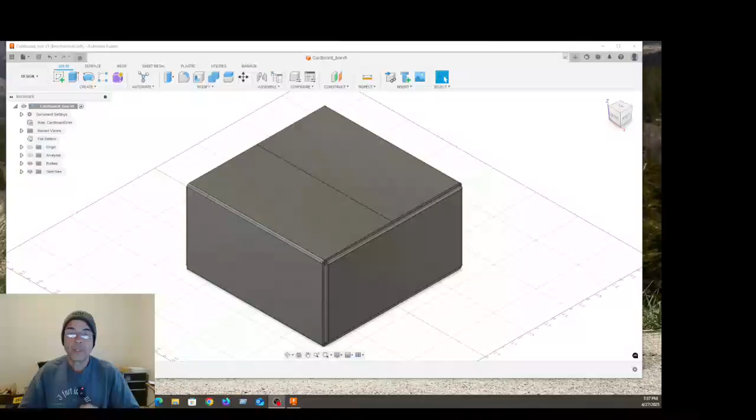Okay, as you're aware, oftentimes one thing leads to another, and that brings us to laser cam with Fusion 360.

So this is a cardboard box that I wanted to make. My wife sells quite a few things on eBay, and oftentimes she has trouble finding a box that's just right. It'll either be a little too small, a little too big, or maybe way too big. So I thought to myself, I have a little hobby dedicated laser machine, I can make these boxes.

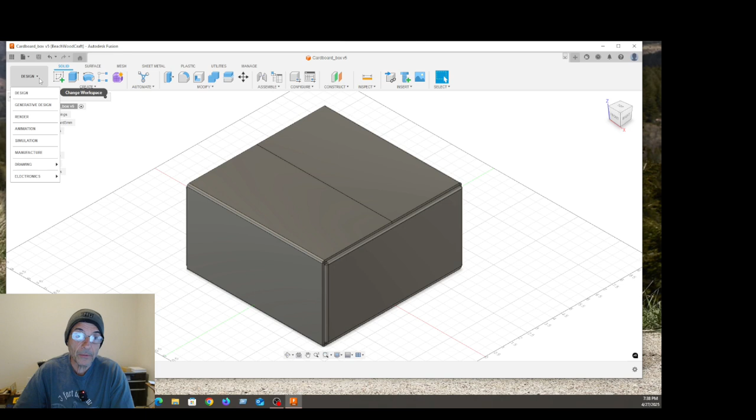Well, when I say little, it's little. If I show you the size of this box, when it's folded out flat, the sheet of cardboard that's needed to make this box is pretty big. The box itself is only 8 inches by 8 inches by 4 inches deep.

But the piece of cardboard we need is over 33 inches long, and the widest part, over 12.5 inches wide. So that's a pretty big piece of cardboard, and that won't fit on my little hobby laser.

But hey, I have a big CNC machine. I can fit a laser module on that, and I can make a cardboard box. So that's what led us down this road.

What led us to Fusion 360 was a couple of things. Number one, I waited too long to buy Lightburn, and the price went from $60 to $99.

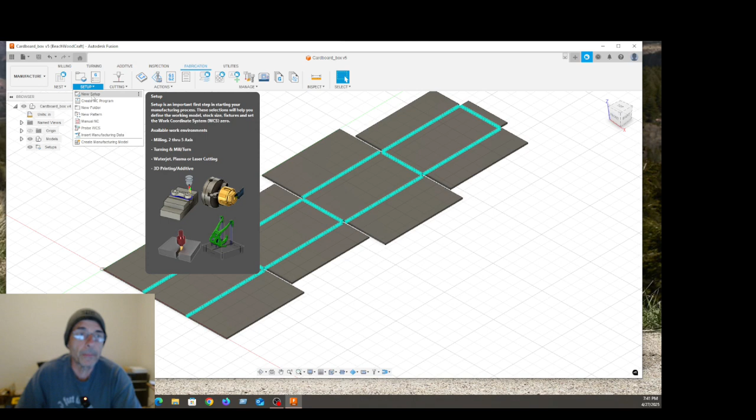First thing we need to do is create a setup. So we're going to do a new setup, and we'll choose our machine. And I'm going to choose a local machine.

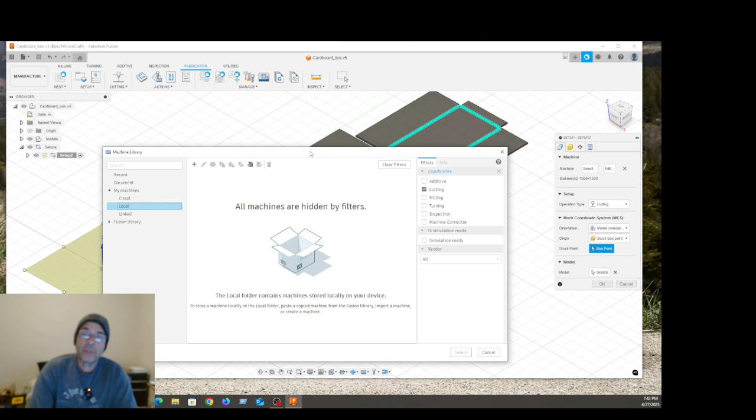Now, Fusion thinks about things in certain ways, especially what type of process it's getting ready to do. So it might be doing milling, cutting, or turning, and then of course additive processes like 3D printing and so forth. But it considers laser jobs, water jet, and plasma type jobs as cutting, and my machine is set up as a milling machine.

So here's where my machine should be, but I can't even find it. It's not here. So let's go in and look at the machine and see why.

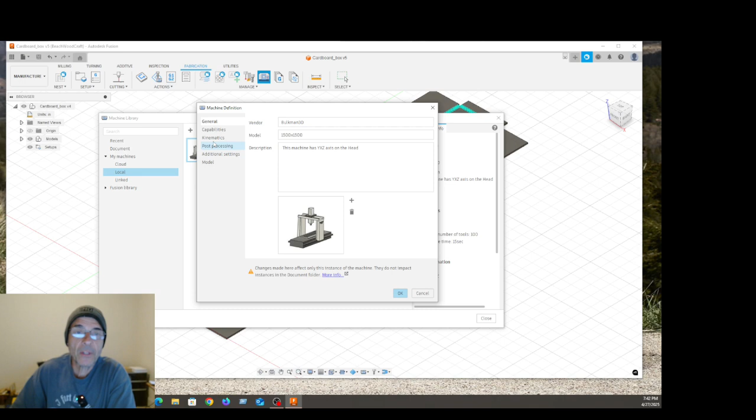So here's my machine. If I edit it, I can see that its capabilities are milling. But Fusion calls this cutting. Laser jobs are cutting. So I have to add that capability.

That's the first step. So once I add the capability, then when I want to do a new setup, I can select my machine. Yay, here's my machine. It can do milling and it can do cutting. So I select my machine.

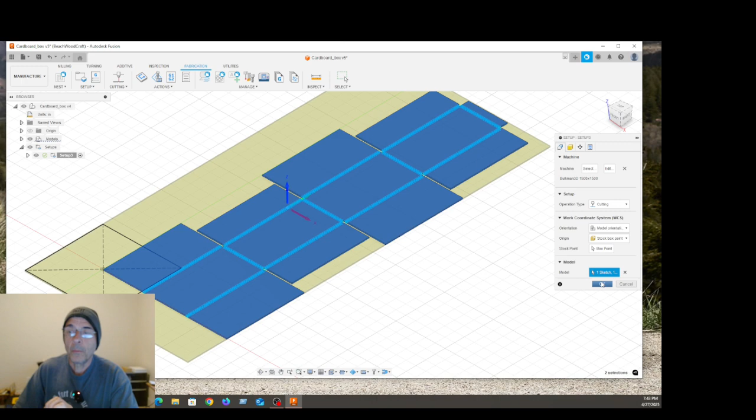I've got my point set up, my model is set up. The rest of these parameters don't matter, because the other thing Fusion assumes is that all these types of processes are 2D processes. So you don't need to move the z-axis at all for this stuff. And so my setup is done.

Now I am going to create a toolpath, and let's select a tool. So my tool for cutting is the laser. So, oh boy, how do I do that?

I look at my library. I don't have any cutting tools. So I'm going to select laser cutter. But how do I get that in here? Can I drag it? No.

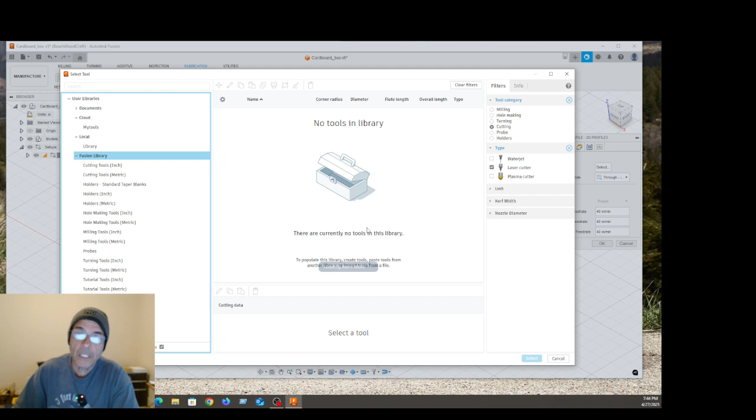So what I need to do is go to Fusion's library and find the tool and copy it into my local library. So there's a laser cutter, right? Inches, metric, choose your poison. Copy it into the local library. All right, so there's my laser cutter.

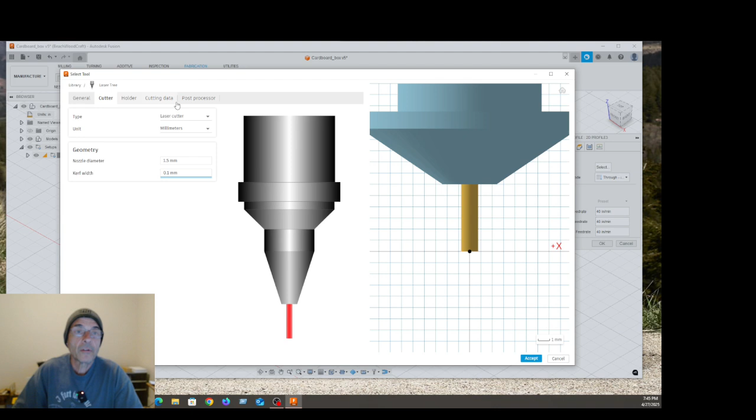I'm just going to edit it to make sure the properties are correct. I can give it a name. Laser Tree is the manufacturer of the one I purchased. Cutter, the kerf is 0.1, not 0.4, so I will change that. And then the rest of the stuff doesn't really matter. I will accept that.

The next thing you need to do is look at these presets for the laser power. So here is feed rate of 100 millimeters per minute and power of 800. My power range is from 0 to 1000. For this process, I'm going to want to use a power of 100 for the...

Well, let's set up a cut process, and then we will also set up a score process. And the score process will be 100, and I'm going to do a speed of 500.

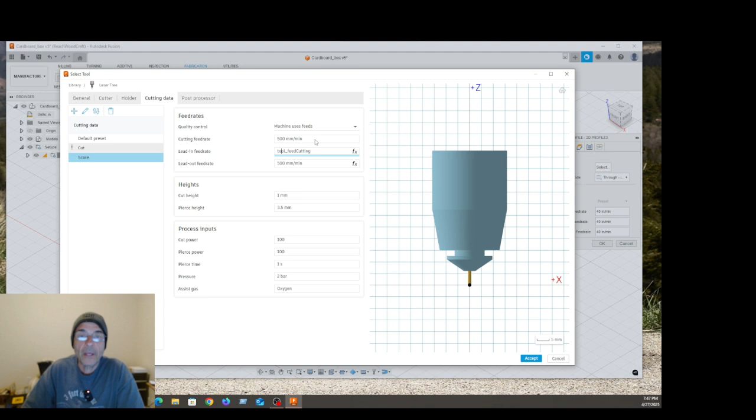And then the cut can stay at those settings, so we'll accept that. Of course, if you don't know these settings, you're going to have to test them and make sure you get them right for the material in your machine. But I'm sure you already know that if you're doing laser jobs.

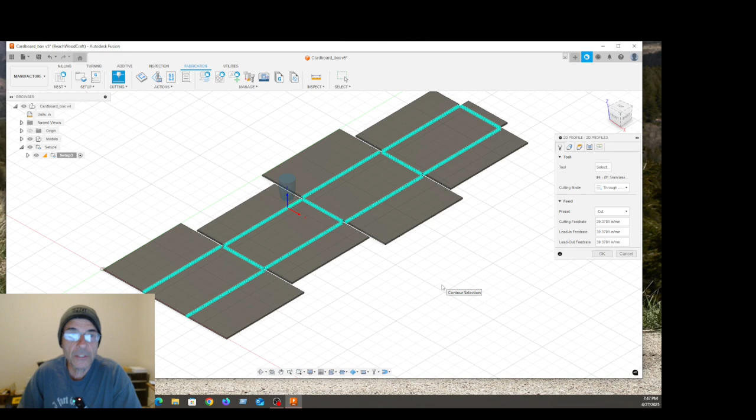So I'm going to select that tool, and now these things have all populated. Let's set up our first tool path. I'm going to do the score first, and I'm not going to try and select all these lines because that's just not worth the time it'll take. Let's just select the innermost path here. We've got 4 little chains. The rest of these things don't matter for this process because we're just doing a score. It's all just 2D. You want to make sure you're only doing one pass.

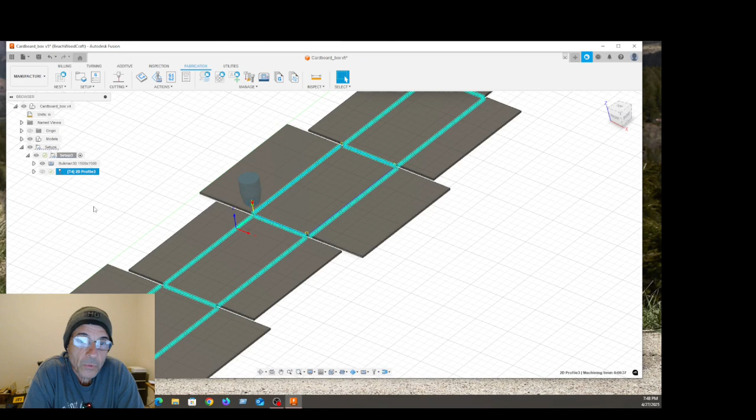So there's our first toolpath set up. We're going to do another one, another 2D profile, which is the only option you have in this cutting process. You can't do anything but a 2D profile.

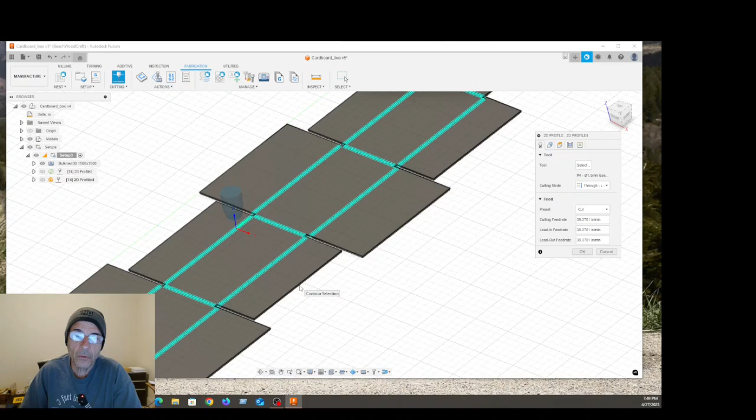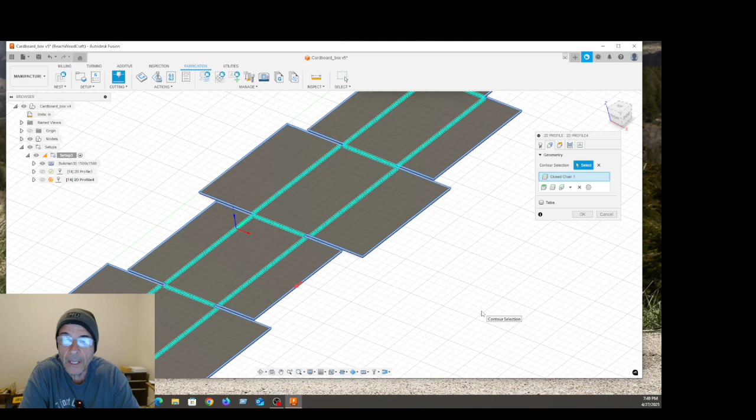Earlier in the video you saw where I made that little sign and I did some fill in on the letters. What I did was I used the offset tool, and I offset the shape of the letter inwards 0.1 inches, at least 1 or 2 more times on each letter to give it some filler, which is something you don't have to do with Lightburn or some of the other softwares that operate laser machines. They have this feature to fill it, and you can set the density of the fill, and you don't have to fiddle around with the shape or the model or the text or the geometry or anything.

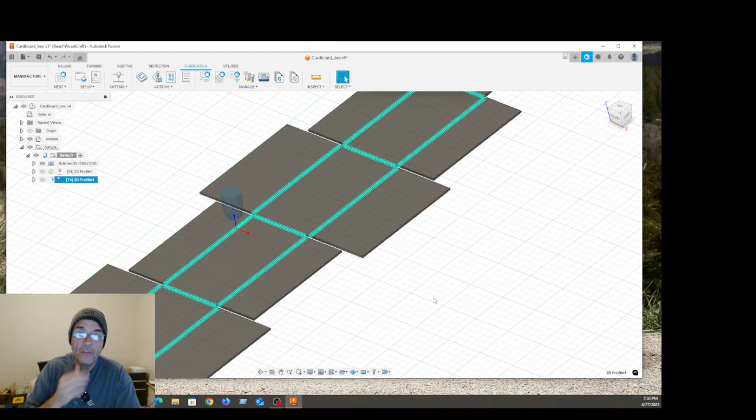It just works. So anyway, I've selected the outer profile for a cut, and at least Fusion has been able to select that without me having to hold its hand, and it looks pretty good. So we're going to select OK for that and let that generate.

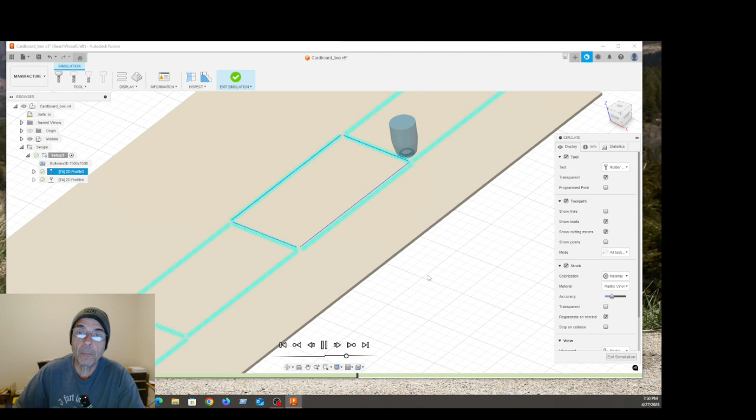That's all generated, so let's take a look. We'll simulate our first toolpath and see—it's not going to be very exciting, but the simulation tools down here, here's the play button. You can change the speed up and down, and it's going to show you what it's going to do. This is really handy if you're doing more complex cuts, and especially anything three-dimensional. You want to run this simulation to make sure that what you think is going to happen is what happens.

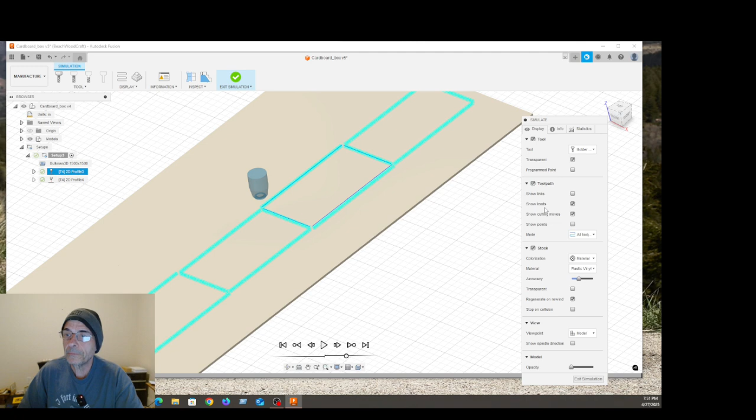The simulation dialog here has a lot of settings that you can turn on and off. You don't have to look at the tool if you don't want to—you can have the tool be transparent or solid. Lots of different settings. You can play around with those and see what you like and what you don't. That looked fine. I'm assuming the outer profile cut is also going to be fine, but we'll quickly simulate part of that just to make sure that looks okay.

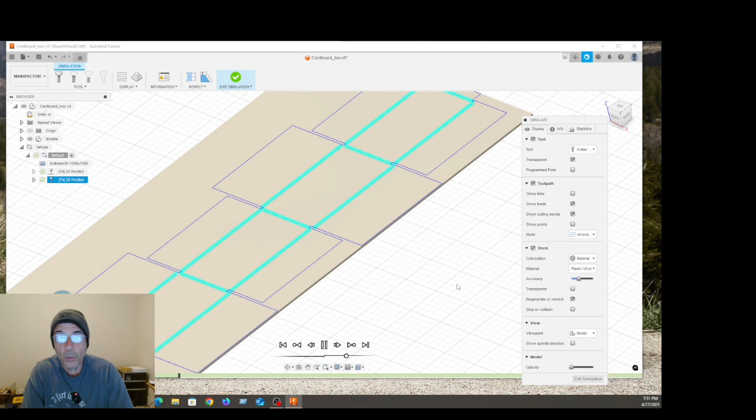And then lastly, we will just generate the G-code files that can be used in a G-code sender, such as Universal G-code Sender or Laser GRBL or any number of other ones that you might choose. So that's good enough. We'll exit that simulation.

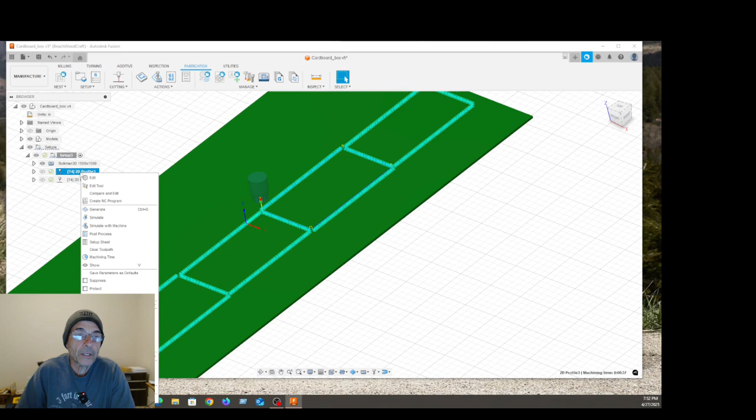What I like to do is I prefer to generate 2 files, one for each process. You can just generate one if you want, but my preference is to generate 2. So if I click on here and say create the NC program, that's what's going to happen. Give it a name such as box scores—I don't know why you have to give it the name twice, but you do—and you can tell it where you want to store it.

The last thing that got me the first time I did this, and you've got to be careful of this—when you post-process this, you can't use your standard GRBL. You have to change it to laser GRBL, and if that isn't in your setup, you may have to add it.

This process is just as easy as hitting post right here. I'm going to go ahead and cancel that. But if you want to look at your process, your post library, just take a look at that.

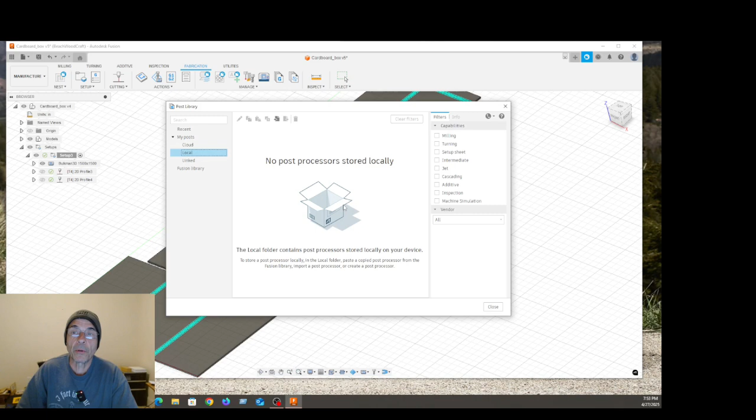My local post library has nothing in it, but my cloud library—notice there's GRBL laser and there's standard GRBL. So you want to make sure Fusion has it in its library, but you have to add it to your library such that you can select it when you post-process.